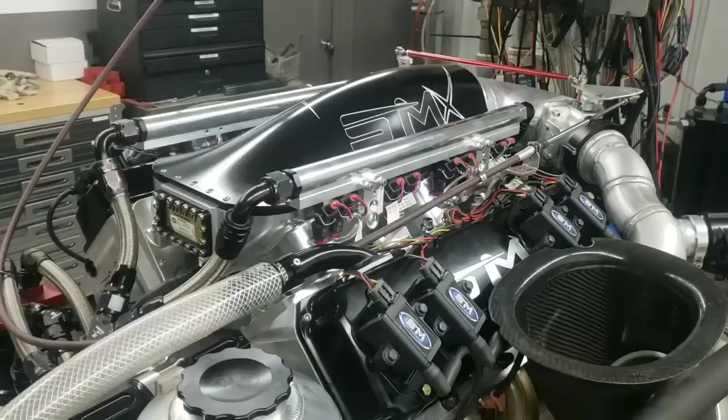I'm Steve Morse. I'm going to show you some stuff about the SMX and want to explain a little bit more, I guess. So what we're doing here, clearly it's on the dyno. I just showed you when we started it up, and it's been a cluster cuss. I'll tell you about that in a little bit.

But anyways, not with the motor, but with everything else I got here, including this stupid little thing right here, where I had to put that on there trying to get the water and grease to quit blowing out of the dyno because it's blown the seal that's back in here, which allows water to go through the bearing, which means I got to replace that pretty quick because obviously a bearing with water going through it and blowing grease out doesn't operate real well at higher RPMs.

So I've got to fix that after I already fixed the dyno once before. Fixed that shaft that's right here, so you can see that's a new shaft that I had made for it, and so at least that's working well.

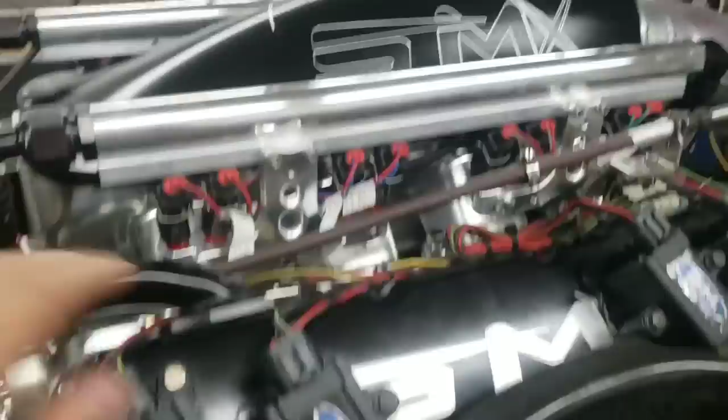But anyways, I want to show the fuel system so you guys really understand this even better. We will run this on gasoline, 93 octane gasoline from the gas station. Okay, so how this works is we have 3 sets of injectors in it. All 3 of them work on methanol. I flick a switch in the car, one toggle switch, it changes the tune to the pump gas tune, street tune. That turns on the electric fuel pump, and then it just uses the bottom set of 220s.

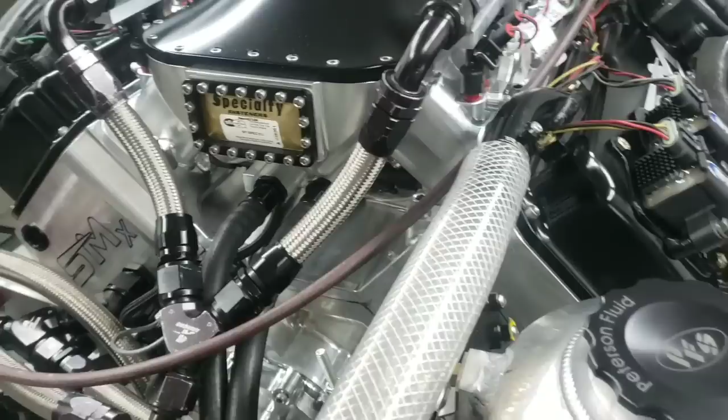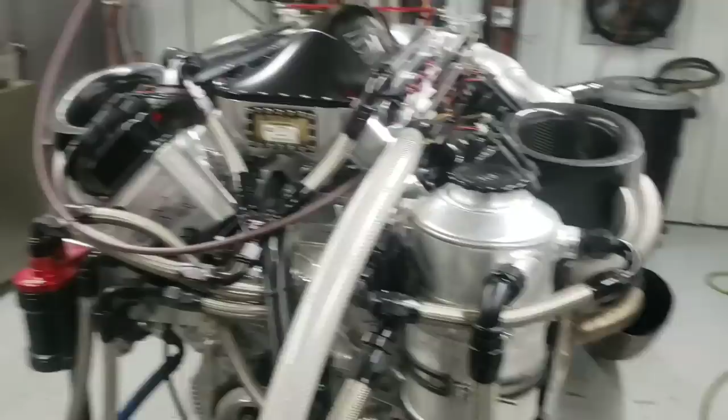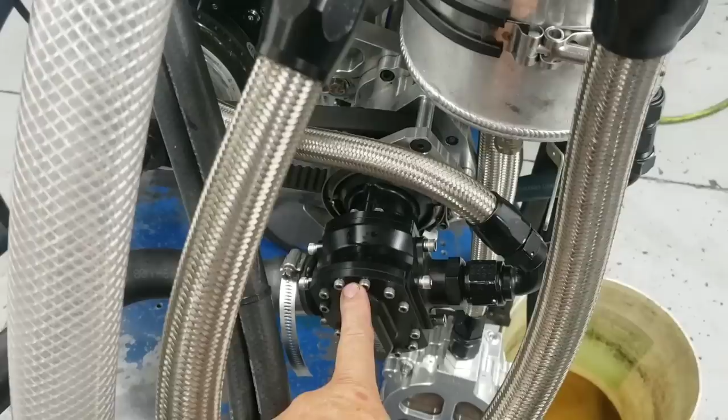Runs, drives, does everything on pump gas, long distance, because we drive this thing usually 200 miles a day in 100-degree heat half the time, and having to keep everything cool. There's a little spud, this is the mechanical pump for the methanol. So it runs methanol, runs all 3 injectors with that fuel pump, and then doesn't use the electric fuel pump, obviously, with the rear fuel cell in the car.

So turn on the toggle switch, which turns on the fuel pump, changes the tune, take the little drive spud out of here, done. That's it. That's all it takes to convert this motor from methanol to gasoline. So showing you some of the water stuff here, which is the most important deal of this. I want to make sure that the tune-up's the same as what it is on my other SMX stuff that I have out there, and it is. So that's all cool.

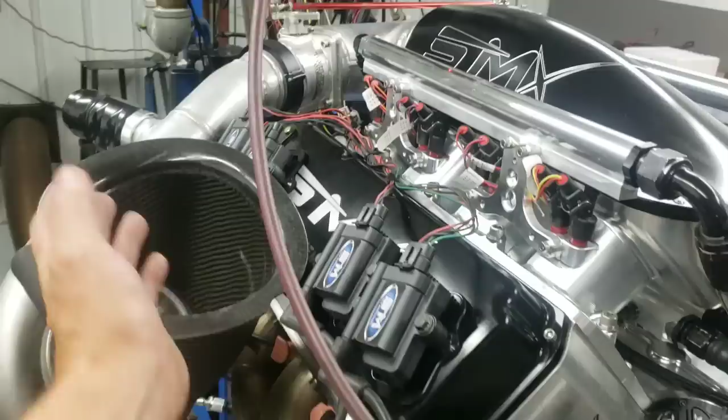So what we're really focusing on is heat and all the water in this deal. You can see the way this works, water in, water out. Water comes in the block at the bottom, through the side, fully encases the entire cylinder wall, the entire outside of the block, although that whole material wall through there, including the sleeve, is almost 3/4 of an inch thick. So it fully encases the whole side of the block, the whole width, whole depth of it, not just some little channel.

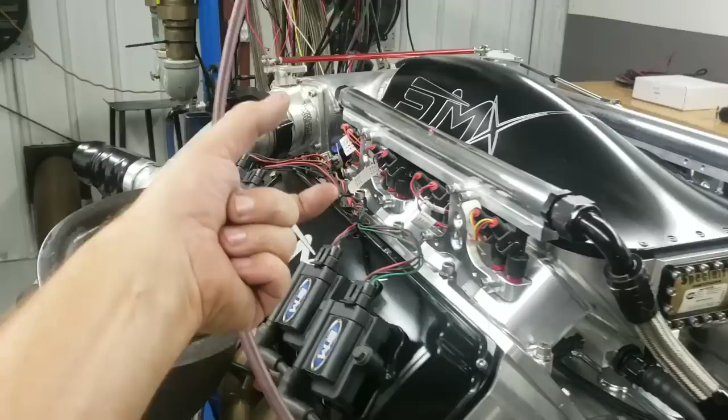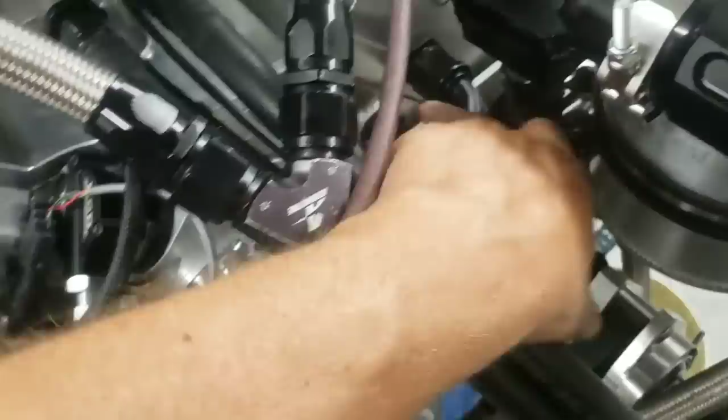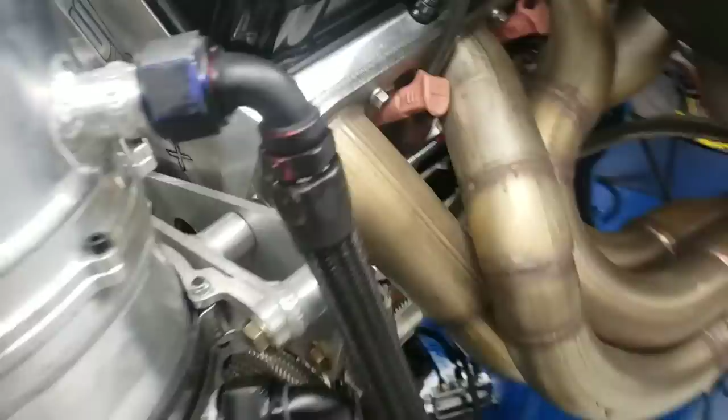Whole width, goes all the way through the back, crosses over, and then comes around through the front, and that whole lifter galley area, all right down there in the lifter galley. And then water comes out here. It's a little hard to see because there's a lot of stuff in here. So this is a better one. This is water out, right here on the block. Let me get on the other side here. And water in is right there. So water goes along the block, crosses over, comes along the inside, all the way across.

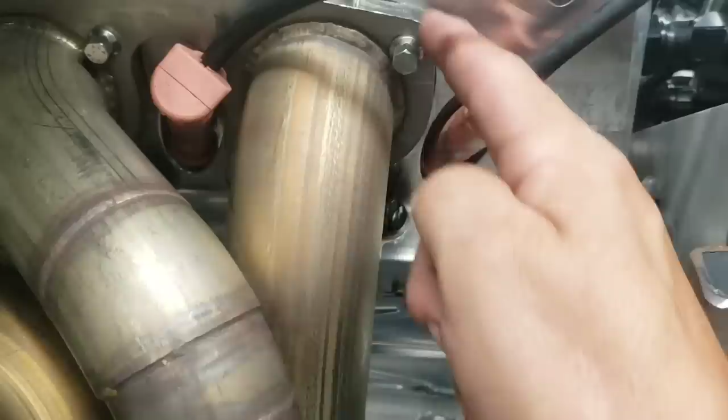Okay? Cylinder head wise, water goes in here, right here on the bottom side of the head. So it runs through this whole channel, and it goes in between the combustion chambers to cool that ridge in between, and then it also goes up around the spark plug area. The header covers most of this here, but it comes up around the spark plug area internally, goes up into the valve spring area.

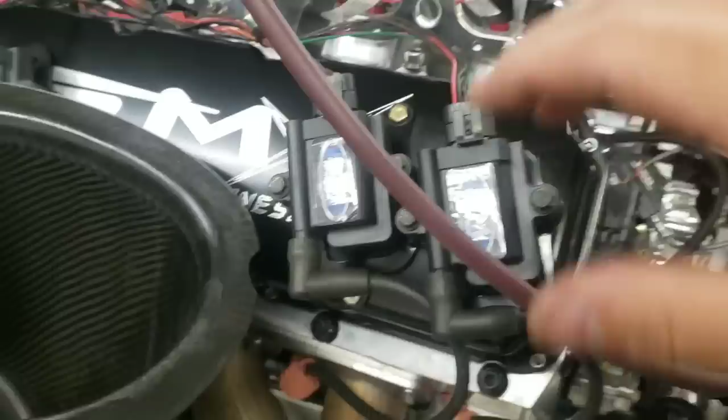So you take these valve covers off, and you see our Manton rocker arm system that we have for these motors, and you'll see that has all the water jacketing in that whole spring pocket area, all the way around the springs on top of the combustion chamber, and then it goes back down in there, because this is an empty lifter valley. So it comes up, over, down, and then fills up the complete channel, the whole length of the head, about 3 inches high, so it gets the whole inside, the whole outside, and gets on top of the cylinder head all the way across.

So it goes backwards, up and over, down, and then back out this exit right here. So water in, water out. It has 4 sets of lines: water in, 4 individual lines, 1 for each head, 1 for each side of the block, and out, 1 each side of the block, 1 each cylinder head. Then you also see here, we can't fit the oil drain backs in the cylinder head on Tom's car on the front, so they're just in the back.

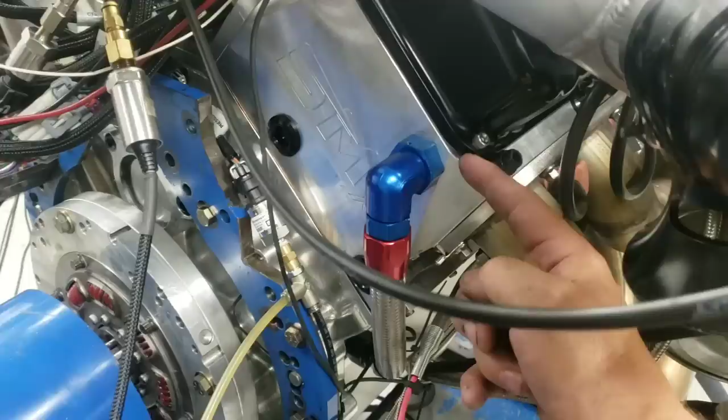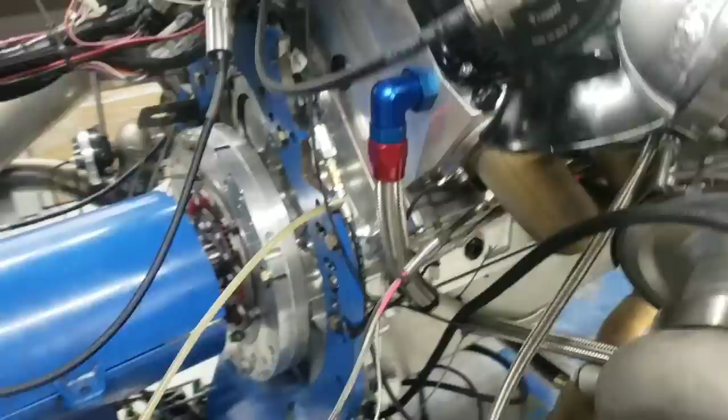So, these fittings aren't black, which bugs me, but you can see that these are cylinder head drain backs for oil. They go back down right into the block, which I have all machined into the wall there, the Y portion of the wall. And it's the same on the other side. So oil is going back through the cylinder head and going down.

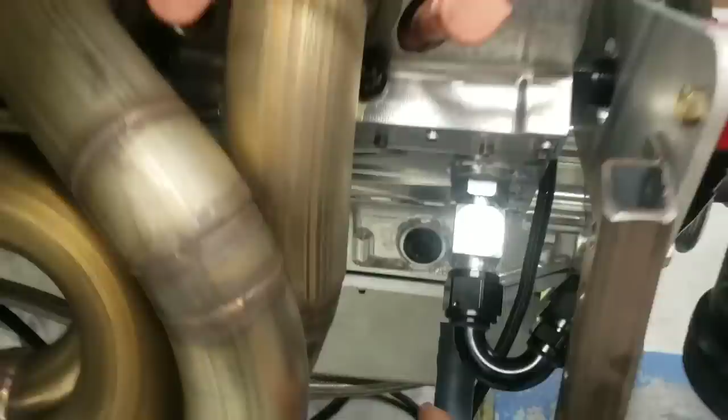And then like on Matt Frost's car or some of the other cars that aren't quite so packed up tight in the front here, it's real easy to run the second down tube going down to right there if it was hooked up. This one we're not going to worry about it too much. But anyways, we're going to go out. I'm going to make an easy pull on this thing, and I'll give you an explanation of what all is going on there. And I'll show you the numbers, and then we're going to get this thing in the car like today.

Alright, so now let's take a look at the numbers, and just to give you a heads up, I have had absolutely nothing but trouble with my dyno on this deal. I had broken it earlier, got the whole shaft fixed. I showed you that on that 635 cubic inch motor and that '63 Vette. So I fixed that part of it. Now I blew a seal out in the back of the dyno, and it is spraying water all over the back of the dyno, and it's going to take the bearing out. So I'm pretty much done because of that.

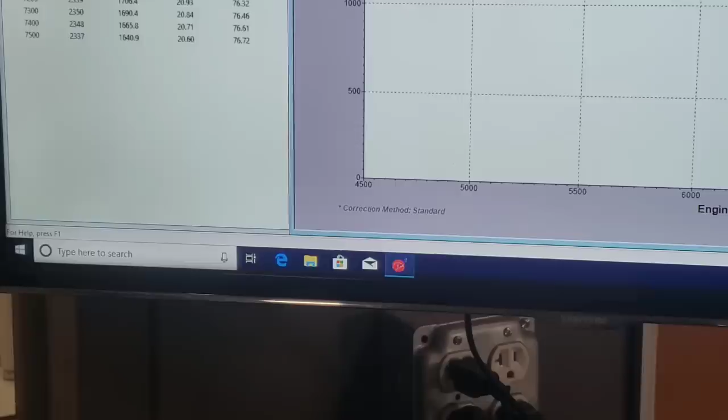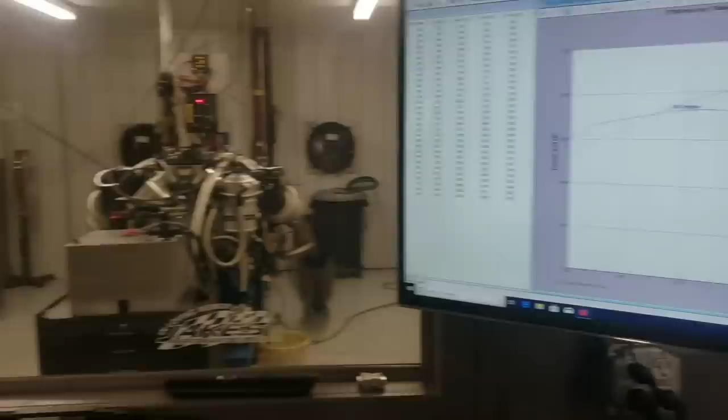And I just bought this computer because I had a complete computer crash and lost all my data, and then managed to have that recovered, all in this amount of time of just initially starting this thing up. Done a computer, done a bearing, had the shaft all fixed already, and the boost control is not working properly. I put new solenoids on it, put everything on it, and not sure exactly what's going on with that. But it is 12:35 in the afternoon, and I need to have that engine in that white car over there tonight, running. Or at least in the morning. So anyways, everything looks really good on this thing.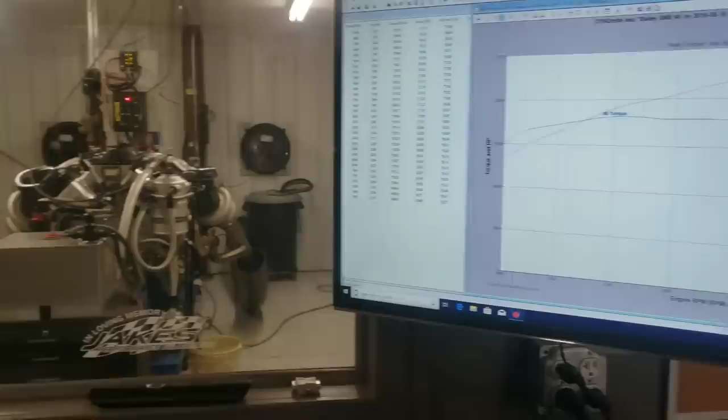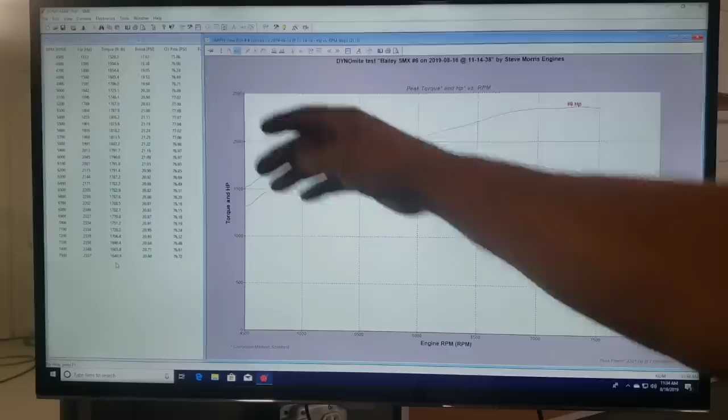It's the exact same tune-up that I have in my 481Xs, even though this is obviously my SMX, which is fully water jacketed coolness, and I'll show you one of the things that's actually really pretty cool. Here you can see, it's your typical 481X package, power-wise. Do lots of these things, it's not that big a deal, horsepower-wise. And I cut it short up here anyways. Obviously these things normally run 9,500 or so, but since my boost controller is not working, you can see it's just flat here, 20, 21, perfectly flat, because I got dome pressure on the wastegate.

I've thrown new ones on there and it still isn't working, and I can't take the one out of the car without costing me hours and hours of unwiring it, and that's a cluster cuss. So I just put manual boost on it. I just want to check the tune, verify that's the same as my other 481Xs, which it is. It's right dead on the money. And you can see at this horsepower level, it makes lots down here because it's got 20, 21 pounds of boost, and just keeps on carrying it. These things run 9,000 RPM plus out the back door. But you can see this is making 2348, 2350, right in this area. And this is just me pulling back on the throttle at only 20 pounds of boost.

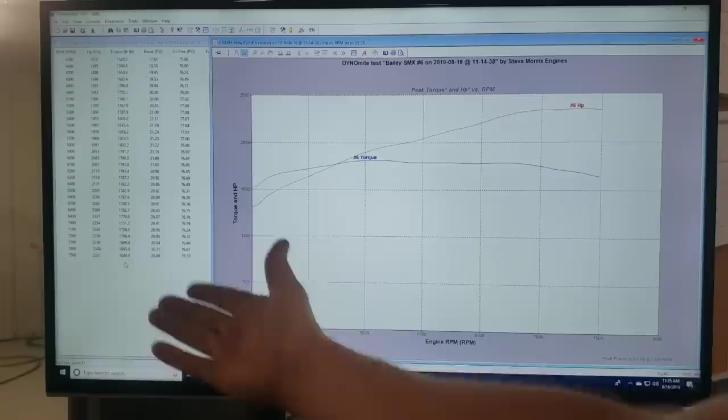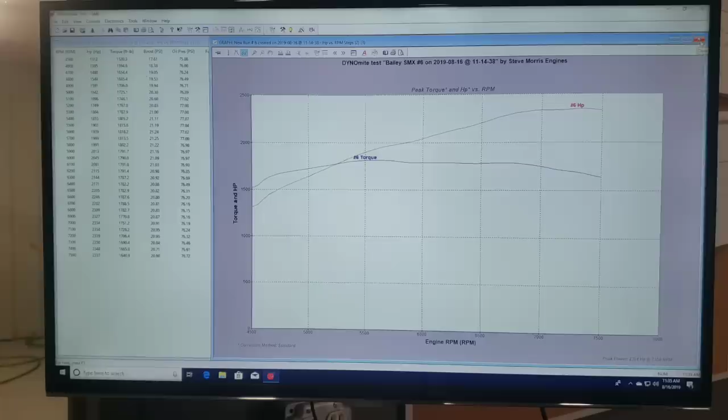So you can figure out what that's going to make when we put 30, 40, 50, 60 pounds of boost at this motor. But I wanted to show you the other thing of what the whole deal is about. Not just the horsepower. Horsepower is nothing. We'll prove this thing out on the track. But I'll show you here, let me save all this. Save, continue, save. Alright, this really cool deal here, go back to the main screen.

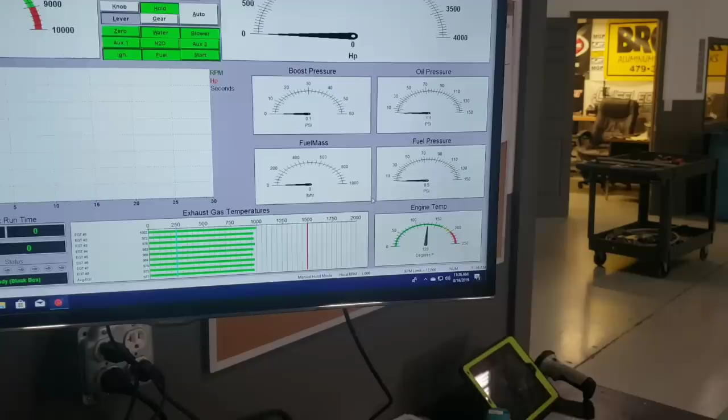And you see right down there, that cool little water temperature gauge of the engine. So I just turn the water pump back on. It'll cycle a little bit of water and go up a few degrees, and then you'll see it just kind of go back down. That is nice. That is what it's all about. It stays cool, does exactly what it's supposed to do. So you can put this on race gas, pump gas, it don't matter, and you can drive this across the country. Just like I showed you earlier, how the whole system works with the fuel system, injection, everything that's there. This thing is just exactly what I wanted it to be.

So anyways, I gotta stop talking because I need to get this thing in the car. I'll have the guys post this video up so you guys can see it, and we'll be out testing in just a couple days.